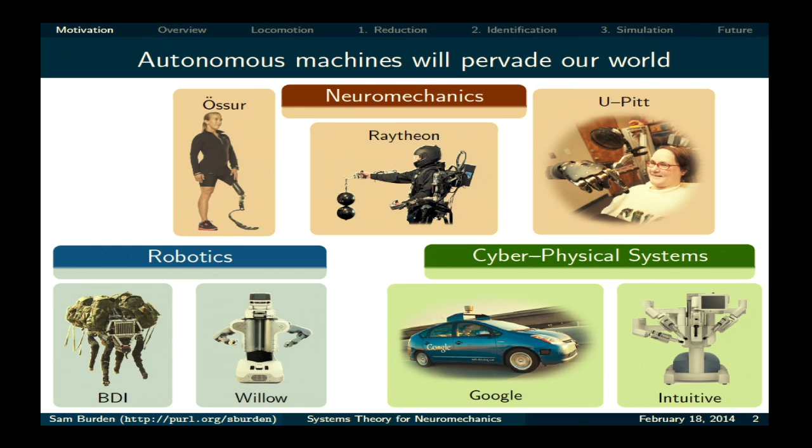And the examples I put up here fall under three broad research areas that I work in: robotics, cyber-physical systems, and neuromechanics. So robotics concerns itself with programming matter to do useful work. Cyber-physical systems deals with the interaction between networked control systems and the physical world. And neuromechanics focuses on the interaction between a nervous system and an environment through musculoskeletal structures, or the body. There's already been tremendous progress in each of these areas, even in just the last 10 years. And the outlook for future research is very bright.

In robotics, we've seen the development of dynamic legged robots that run at body lengths per second at scales ranging from just a few centimeters in length up to multiple meters, like this latest Wildcat robot built by Boston Dynamics. And in robotic manipulation, robots have already proven themselves in factories in high-precision, repetitive assembly tasks. And they're beginning to transfer those skills to the home to perform domestic tasks like folding towels and washing dishes. And the future vision for this, laid out by the NSF's recent National Robotics Initiative, is collaborative robots working together with humans both in factories and in the home.

In neuromechanics, there has been tremendous progress both in the basic science as well as applied biomechanics and applications to human motor control. So in the fundamental biomechanics end, for instance, this experiment with cockroaches running over rough surfaces was conducted by Simon Sponberg, who's in the audience over here. And they found some fundamental insights into the mechanisms that animals use to maintain stable gaits in complicated environments. For instance, it was shown that cockroaches don't even modify the activation pattern they're sending to their muscles to run over this very complicated and fractured terrain. They're relying instead on passive or mechanical self-stabilization mechanisms.

And then in the more applied and human biomechanics end, we've developed prosthetic devices that enable amputees to perform at the highest level of human ability, competing in the Olympics. And we've also been developing brain-computer interfaces that enable people who've never been able to move their limbs to use a robotic arm to perform useful tasks. And some of these techniques are even making their way into textbooks; this is becoming fairly standard material now. And the vision for this, for instance, as a subset of the NIH's BRAIN initiative, is to develop personalized tools for healthcare for individuals.

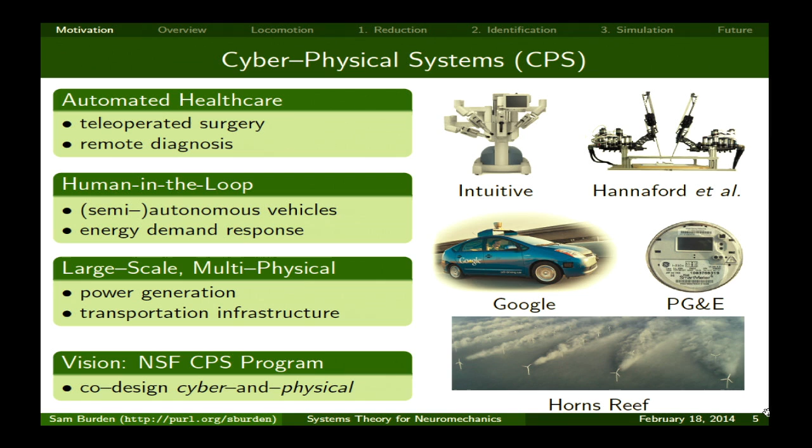And then we've seen the rollout of both large-scale human-in-the-loop systems and large multi-physical infrastructure, for instance, power generation and transportation. And so the vision for this, and the NSF's been working on this for a while with their CPS program, is the co-design of the cyber computational elements together with the underlying physical infrastructure, for instance, the grid or the transportation network. So as I've said, the future outlook for research in each of these areas is very bright, but there are some fundamental engineering challenges standing in our way of getting to that point. And I'm just going to highlight a few of them here.

In robotics, the devices we build still require or rely on very careful calibration, and their performance tends to degrade in not a very graceful way, especially in dynamic or adversarial environments. In CPS, the sheer scale of both the temporal and spatial scales that the systems operate on, and the fact that they're often multi-agent and multi-physical, makes them difficult even to model, let alone analyze, synthesize, and verify.

And then in neuromechanics, we've had great insights into particular tasks or in constrained laboratory-type environments, but it's proven difficult to generalize the insights across and between tasks, or more generally, across organisms that operate at vastly different scales or are comprised of very different materials or have different morphology or kind of the shape of their body.

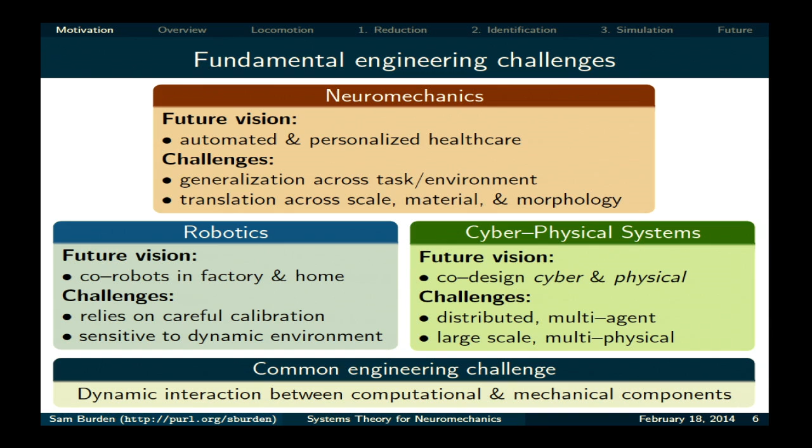And so even though these three areas seem initially quite disparate and separate, I see in the challenges that I've chosen to highlight here a common thread, which is that in each area, what's standing in our way is the problem of engineering and analyzing the dynamic interaction between the computational and mechanical components in the system.

So to go into a little bit more detail about what I mean by that, for instance, in robotics, the typical task is to design the controller and the sensing and actuation systems to interface through the body, the actual physical mechanism, with the objects and obstacles in the environment.

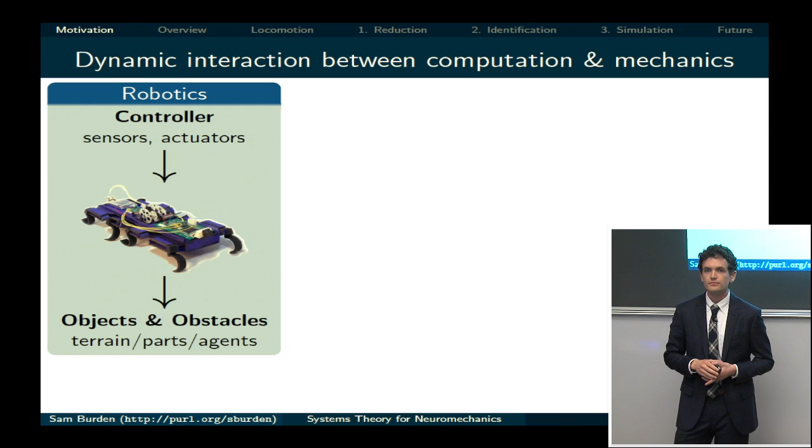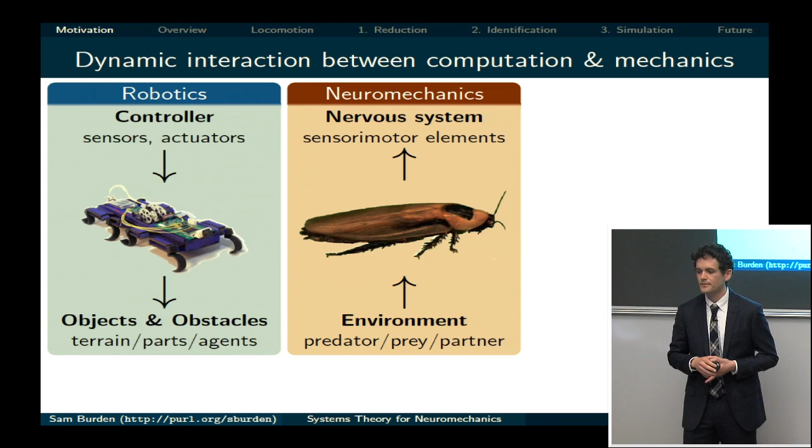In neuromechanics, we're often concerned with actually reverse engineering or going in the opposite direction. So starting from the ecological context or environment that the organism evolved in, using that to determine the constraints and the influences on body design, and then going from that to try to infer something about what the sensorimotor elements in the nervous system are doing to affect the motion that we see, or the behavior we see.

And finally, in cyber-physical systems, we're really concerned with the simultaneous design or kind of going in both directions. So we need to design both these cyber or networked elements and their dynamic interaction with the underlying physical world or infrastructure that we're designing.

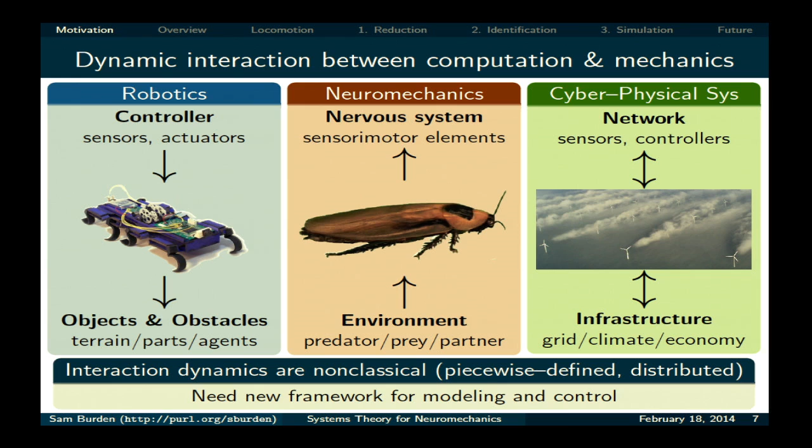And in each of these cases, I want to point out that the dynamics we're looking at are fundamentally non-classical. By that I mean, for instance, they're piecewise defined or so-called hybrid dynamical models, or they're distributed over, again, large scales that don't always fit into the classical modeling paradigms. And so my assertion is that we need new tools and a new framework for both modeling and control in these systems. And so my work is targeted at developing and contributing to the analytical, computational, and experimental tools that let us investigate the dynamic interaction that I've highlighted in each of these areas.

And so the common set of tools that I bring to bear on these problems are the techniques from control and dynamical systems theory, or kind of extending and developing new techniques from this area. And more than just solving isolated problems in these separate areas, I see these techniques as providing connections and potentially bridges, enabling us to translate results between domains. And I'll come back to this idea more at the end of my talk.

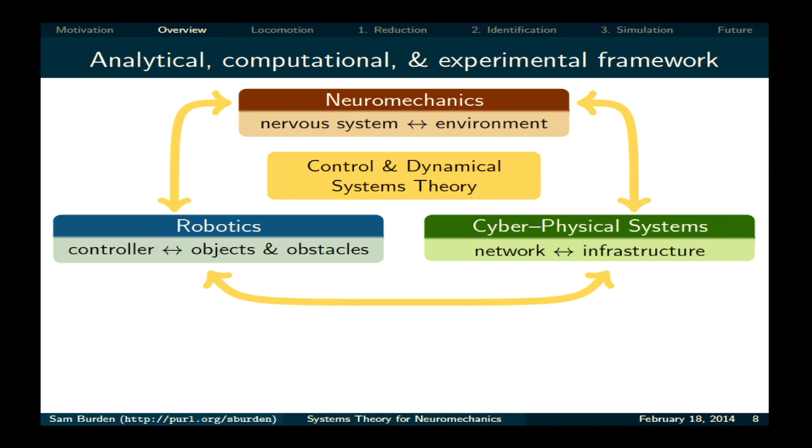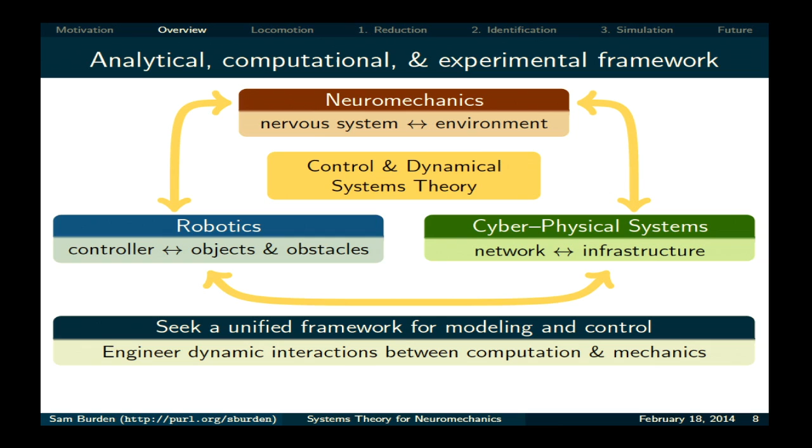And so specifically, I'm trying to develop this unified framework that lets us engineer these dynamic interactions that arise in all three settings between the computational and mechanical elements in the system. And so what I'll focus on specifically today is a set of three key contributions I've made in these areas that pushed us toward a framework for systematically studying terrestrial or legged locomotion. So I'll focus on these two model systems, the cockroach and these small-scale legged robots. And I'll talk about three results.

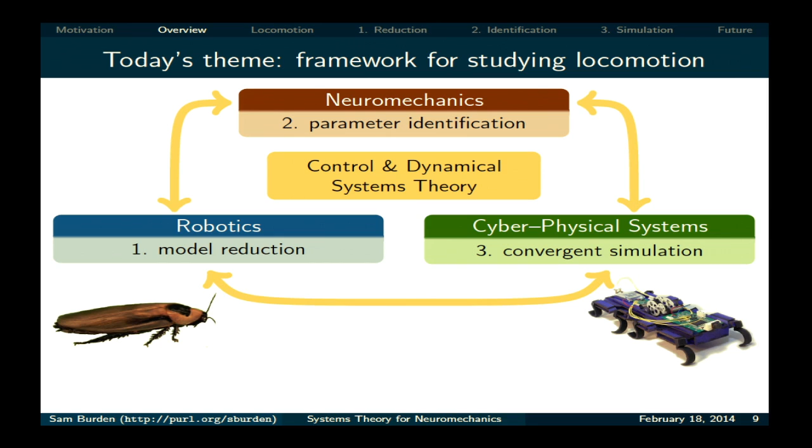The first is a technique for extracting low-order models from more detailed models of these systems. The second is a scalable algorithm for estimating unknown parameters in these models. And then the third is basically enabling us to implement models on a computer and verify that we're actually accurately representing these abstract or analytical models in the digital computer so that we can, for instance, simulate and perform numerical calculations. And altogether, and I'll describe this once I've talked about these three results, I see emerging from this a systems-level theory for neuromechanical systems, or this interaction between nervous systems or computational elements and the physical world.

So to lay this out in a linear order, I'm going to begin with the motivation for how I got interested in this locomotion problem by describing some surprising phenomena that arise when we look at animal gaits and the motion of animals. And then I'll go through these three key results on model reduction, system identification, and numerical simulation. And finally, I'll conclude with some ideas for future directions in research in these areas.

So to begin with, one observation you can make is that though we've made tremendous progress building robots that perform at high capacity, like I showed in the introduction, the performance of robots in most contexts still pales in comparison to that of animals in similar situations. So I'm going to show a sequence of videos that are all from Dan Goldman's lab at Georgia Tech, recent work from there, that kind of highlight this.

So if we take a robot whose gait and whose design was optimized for hard level terrain, and we throw it in a new environment, on a flowing, fluidized, granular media, in this case it's poppy seeds, but you could imagine like a sandy beach or a muddy field or something, then the performance of that robot will often be very poor. So in this case, the robot really just spins its legs and it kind of stays stuck. It makes slow progress, but not very impressive.

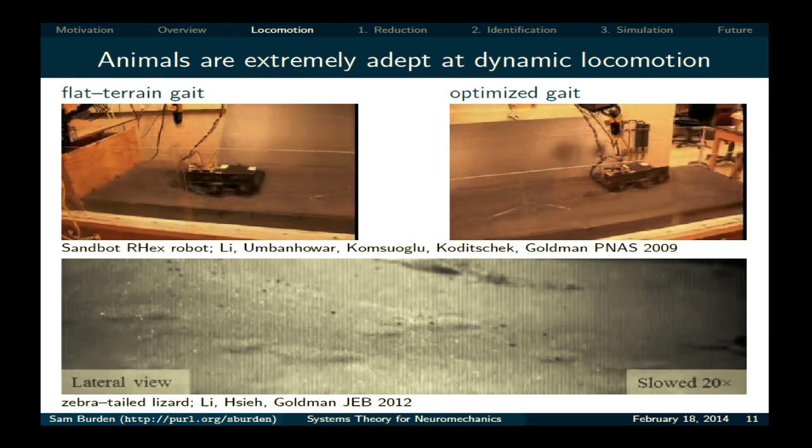And so it's clear that the animals have design principles embodied in them and control principles that we don't yet understand, that we're not able to engineer into our devices. And so I'm interested in trying to extract those principles from the animal behaviors so that we can engineer better systems. And so if you focus on what animals are doing, there's actually a lot of surprising phenomena their gaits exhibit that might suggest some of the mechanisms that are enabling their performance.

So for instance, if I just take data from a running cockroach, which I have here, and I look at the fore-aft foot position of all 6 legs in the center of mass reference frame, and I plot that versus time, as you're seeing in the middle plot here, then you see a highly regular structure emerge. And indeed, if I rescale the time axis by % progress through stride, I get the plot on the far right, this is a gait phase statistic, and I see an almost periodic structure emerge.

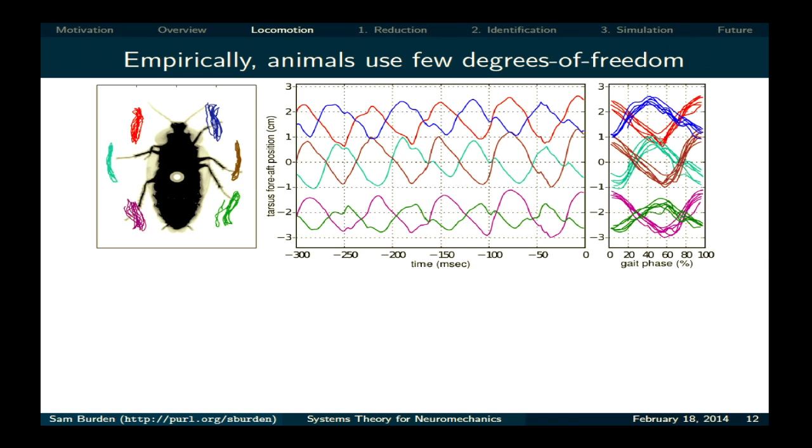It's very striking. And so indeed, if I were to estimate that single statistic as a function of time, this gait phase, I could reproduce or predict to high accuracy the entire mechanical configuration of the whole animal. And if I further refined this model and added extra dimensions and accounted for more of the variation in my data set, then I could arrive at a more accurate model and at some point reach diminishing returns in terms of my ability to predict what's happening. I essentially capture all of the behavior of the system.

And so this was actually carefully conducted by a colleague and collaborator of mine, Shai Revzen, recently. And what they showed is that these cockroach dynamics, when they're running just on hard ground with no obstructions, are approximately 7-dimensional. This is really surprising, given that the animals have more than 7 mechanical degrees of freedom in every limb. So there's a huge degree of dimensionality loss and intrinsic reduction happening in these animal gaits, and we don't really understand why that's happening.

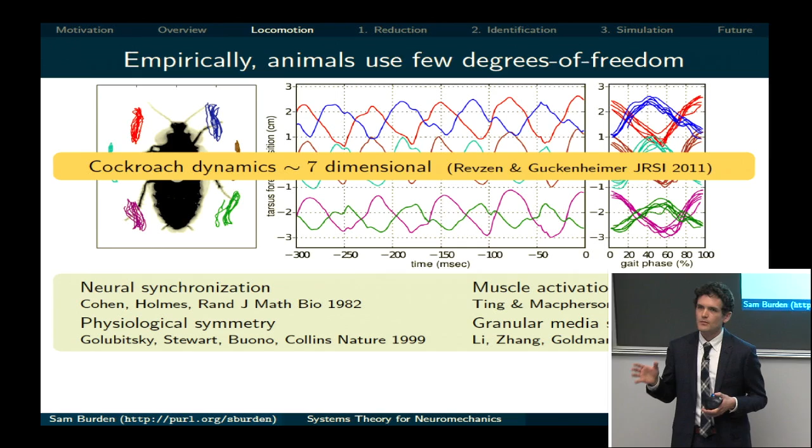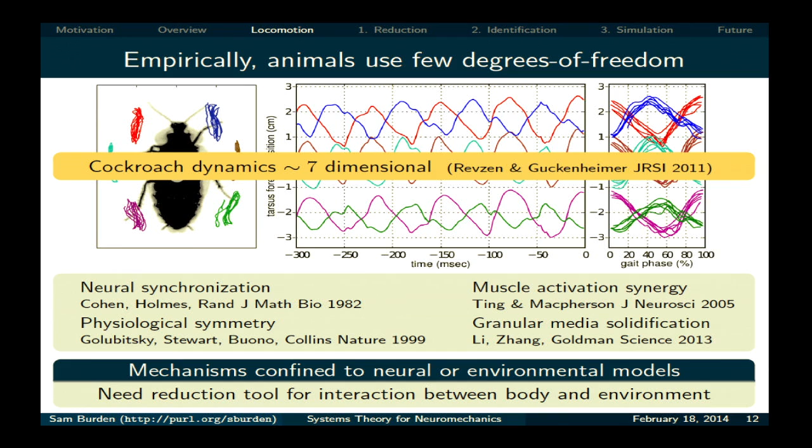The mechanisms are partially understood, mostly at the level of neural synchronization or muscle activation symmetries and synergies, or at the external environmental level, these solidification effects I mentioned that can make even granular media appear as firm and solid as hard level ground. But there still could be something in this dynamic interaction between the nervous system and the external environment. And so this is exactly the area that I'm focusing on and that I'll present in this talk.

And so what the evidence together suggests, though, the fact that the animals have this low-dimensional behavior, is that it should be possible to describe their behavior using a mathematical model of significantly reduced order, literally on the order of 10 states. And if this were possible, if I could use this model, this framework was proposed by Full and Koditschek about 15 years ago.

In particular, what they said is that this low-dimensional model shouldn't only reproduce the sort of average or steady-state behavior of the physical system, but moreover, it should accurately predict the system's response to perturbations and parameter variations. If this were true, if I could find a reduced order model with on the order of 10 states that accurately predicted the behavior of a physical system as complicated as a cockroach or a small-scale robot, this would be an extremely powerful technique for studying the systems, because I could effectively reduce questions regarding design or control to the equivalent questions in the simplified mathematical model.

And because the model is so simple, I could completely analyze it, either by pen and paper or just exhaustive numerical experiments. I could solve my design or my control problem and lift the solution back up this hierarchy into the original physical system. But clearly, there are some significant gaps that remain to actually operationalize this idea and apply it to any particular physical system.

So in particular, any mathematical model we make, no matter how detailed, is always an approximation of the underlying physical world. And so necessarily, we have to go through some process by which we associate the model with data collected from the physical system and validate its behavior. And secondly, once I have a high-dimensional, detailed mathematical model that I think is reproducing the behavior I'm seeing, I need some systematic techniques to actually extract from it and distill it down to one of these simplified reduced-order models.

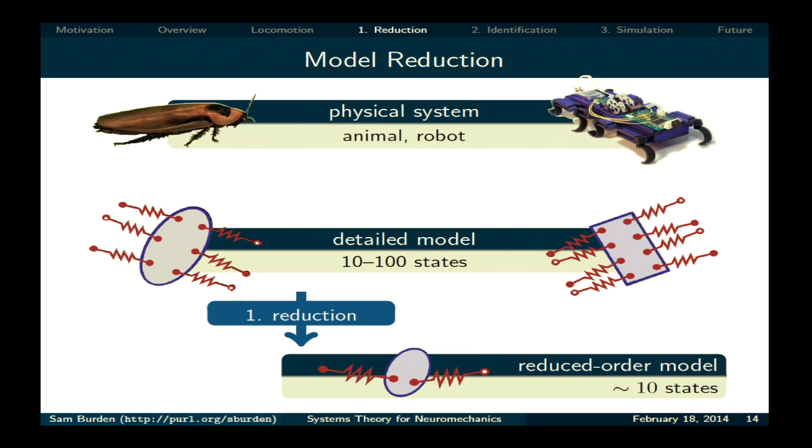And then in the context of simulation, there had been an algorithm proposed, and I'll get into some of the details about why that doesn't apply to this class of models in general as well. So to begin, I'm going to focus on this model reduction problem, and specifically finding a technique that enables model reduction to happen near periodic orbits in a broad class of models for locomotion.

So the initial example that I want you to have in mind, and that I'll refer to throughout my talk, is this vertical hopper example to illustrate the concepts and the results and the techniques that I'm presenting. I want you to keep in mind that this is not the only model I can apply these techniques to. It's just the one that makes it easy to explain, and I think there's rich intuition there. So this model consists of two masses that move vertically in a gravitational field, and between them they have a spring and an actuator.

And so if I drive the actuator with kind of a periodic input, then the system settles into a sort of periodic steady state hopping motion like you see. And I should point out that the model here is that when the foot strikes the ground, it instantaneously dissipates all of its kinetic energy. So it's a perfectly plastic mechanical impact.

You can think about, when my foot actually strikes the ground, it doesn't sort of ricochet off in an elastic way. It actually sticks and deforms and kind of adheres to the substrate. And so there's already something interesting happening in this model that you might not have thought of the first time you saw it, which is an interesting kind of dimensionality loss that appears to be happening.

So if I imagine the state space for this system in the air mode and in the ground mode, then I get a picture that looks kind of like this. In the air mode, when the foot is off the ground, there are two mechanical degrees of freedom. And so the system is four-dimensional, that I've illustrated with the three-dimensional looking tube up there, so you'll have to bear with me on visualizing four-dimensional spaces here.

But then when it's in the ground mode, when the foot is on the ground, it's at zero height and zero velocity. So I can effectively remove it from my state momentarily, and I can just think about the one mechanical degree of freedom that remains in the body mass. In which case, that bottom patch, that two-dimensional sheet there, is actually an accurate picture of the two-dimensional state space in that mode.

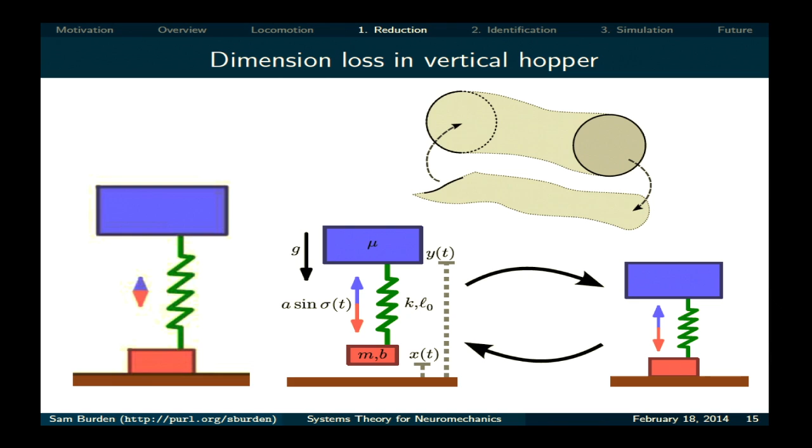And when the system's doing this periodic hopping type motion, it's cycling back and forth between these two regimes. So if I think about a periodic motion here, and I think about initializing a volume of initial conditions in that unconstrained air domain, there's two mechanical degrees of freedom, so there are four dimensions that volume takes up. And then as I flow it around one cycle, when all of those initial conditions reach the ground domain, then this new constraint appears and they flatten down to a two-dimensional sheet kind of volume.

But then because the model is deterministic, when I keep on propagating and those initial conditions return back to their air domain, they can't regain the dimensions that were lost. So they're still constrained to being on a two-dimensional subset of the full four-dimensional space. So already, in this thought experiment, there's already some kind of hint of dimensionality loss appearing, even in this very simplified mechanical model.

So it's exactly this route to dimension or model reduction that I'm going to significantly generalize and formalize in the remainder of this section. So to do that, I need to build up just a little bit of mathematical notation. So the class of models that we're interested in are these hybrid dynamical systems. You can think of this as just comprised of disjoint, regular, ordinary differential equations on subsets of Euclidean space. That's kind of what I have illustrated here.

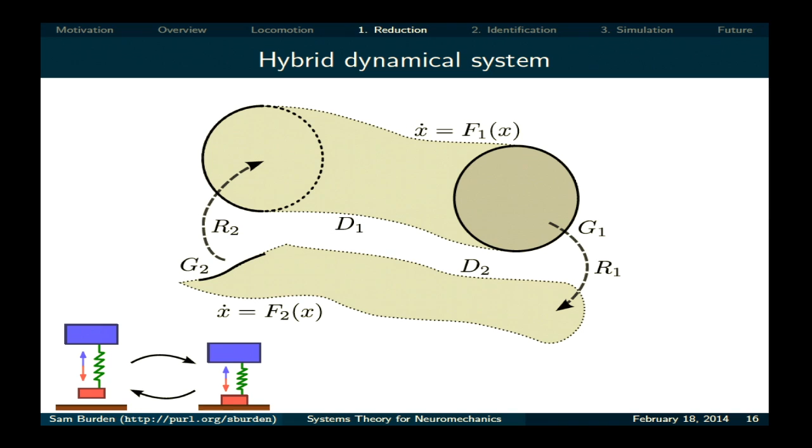So I have D1 and D2. You could think of those as just two different versions of some Euclidean space. And on each of them, I have a differential equation, x dot equals f of x, f1 or f2. But then I also have these rules or these regions where I switch between the two domains. When my foot strikes the ground, then I actually jump to a different regime or a different space.

And so if I think about the dynamics for these systems, starting from some initial condition x0, I basically solve the continuous time ODE until I collide with one of these guarded regions indicated by the g's here, at which point my trajectory is instantaneously reset to the new domain, and I continue flowing as before. Just a little bit of notation I'm going to need later on in my talk is I will let phi denote the flow for the system. So phi of t comma x0 is the point on the trajectory that starts at x0 after it's gone forward for t time units.

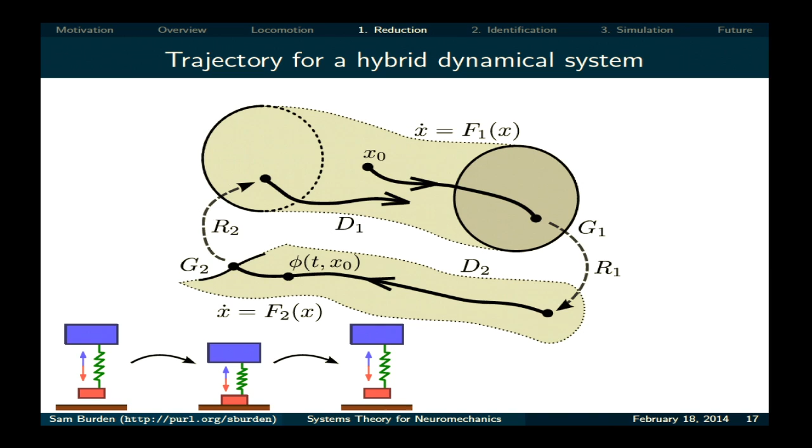And we'll be particularly interested in periodic trajectories in this class of systems because those model in a canonical way the periodic gaits of animals, at least in their center of mass reference frame. And so a periodic trajectory here is just going to be one of these trajectories that eventually folds back on itself and just continues cycling around, repeating the same path over and over again.

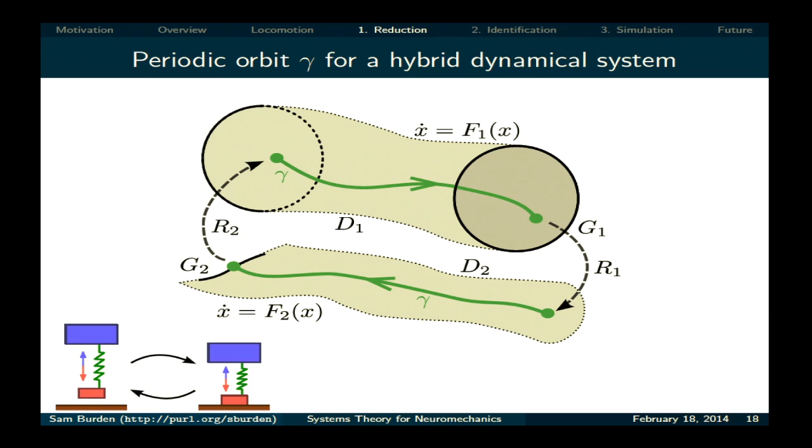So whenever that happens, I'm going to denote that by gamma, and that'll be how I refer to periodic orbits. So to study the dynamics near these periodic orbits, I'm going to use a tool that was actually originally developed for classical ordinary differential equation dynamical systems called a Poincare map. So if you haven't seen this construction before, I'm going to quickly go through it.

So formally, I start from some initial condition x0 in the section, and then I solve this trajectory forward in time until it collides with this surface again. And I use that to define my Poincare map P at the initial condition x0. So if you've never seen this construction before, your mathematical sense might be kind of tingling a little bit. You might be wondering whether this even gives a well-defined mathematical object or whether it has any reasonable properties at all, continuity, differentiability, et cetera.

But it turns out that for the models that we're interested in, under some fairly mild assumptions, and this has been known since the 50s by the Soviets, this map defined in this way is actually smooth. It's differentiable in a neighborhood of the fixed point c. Note that if I were to evaluate the Poincare map at c, I would just get that point back because that's on the orbit. So this map is actually well-defined even in this hybrid setting. So now we can use this to try to study the dynamics near this orbit.

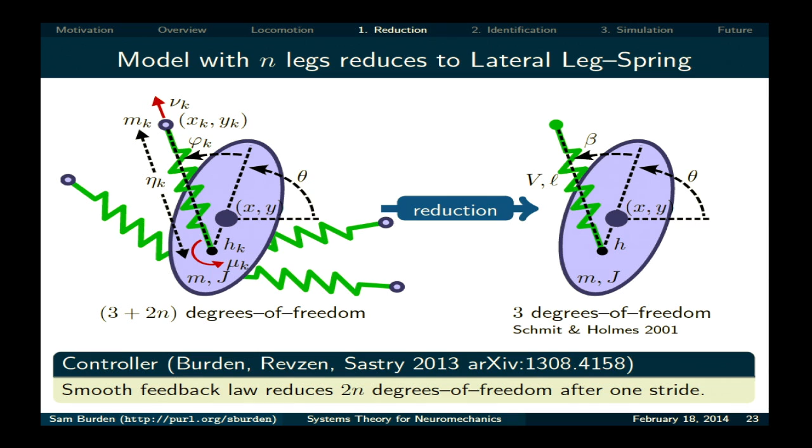And in fact, if I replaced it with a different state feedback law, or if I perturbed the state feedback law I had, then this sort of exact reduction phenomenon wouldn't occur, generically in this case. What does happen generically, and the details are in this arXiv preprint, a recent submission that we have, is that another type of reduction happens. There's an approximate reduction that occurs, even in that case. So for anybody that's interested in that, I'd be really happy to talk about that more after the talk. But that's a great question.

So to conclude this section, I want to point out that basically we have this technique for model reduction that shows that models for periodic gaits in this class of hybrid systems generically reduce their dimensionality. This is this topic I was talking about right at the end.

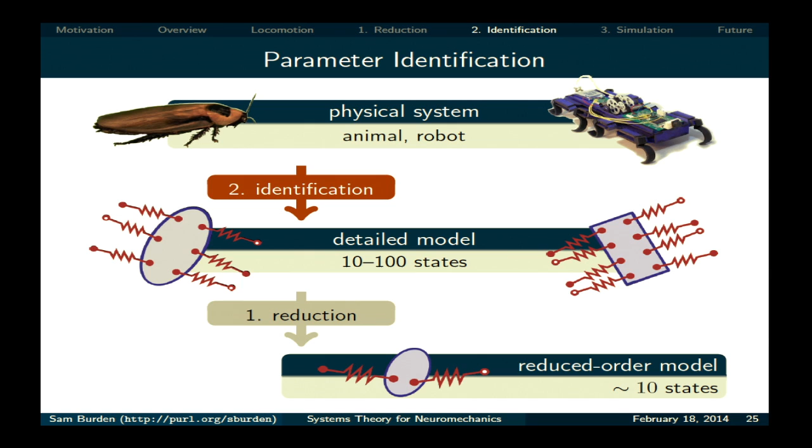So now I want to move on to show how this reduced order structure can be used to implement scalable parameter identification algorithms for this class of systems. So just to remind you, the kind of problem that we want to try to solve is we have these interesting physical systems, cockroaches and robots, that are executing rhythmic behaviors in the environment, running across the ground or on a treadmill. And what we want to do is take a mathematical model and tune the free parameters for the model to best reproduce the behavior of the physical system that we can.

And so specifically, the formalism that we use to do this is prediction error minimization or expectation maximization. And so just to get an initial start on this problem, we try the kind of blunt approach of just saying, okay, let's assume that I have a model for a physical system. Again, I'm just using vertical hopping as an illustration here. That I can simulate my model and observe it, so that's this y function giving me observations, for instance, position or height of center of mass as a function of time.

And I'm going to assume in this identification setup that the data I'm getting from my physical system are noisy observations of simulations from my actual model from some unknown initial condition z star. So then what I'm going to do is choose some error function that basically just measures the discrepancy between the observations I get from my simulation or my model and from my physical system, and I'm going to search over the state space and the parameter space in order to minimize this prediction error. This is a very blunt approach, but it turns out to be hard to solve even this version of the problem, let alone more refined further techniques we'd like to develop.

And the assumption I'm going to impose, just to make the problem remotely tractable, is that these observations should be smooth functions of time, so they should be smooth along the trajectories. So for instance, this is pretty reasonable in the context of locomotion because I'll typically attach motion capture markers to the trunk of an animal or a robot. And so those data at a high level of accuracy will evolve fairly smoothly in time.

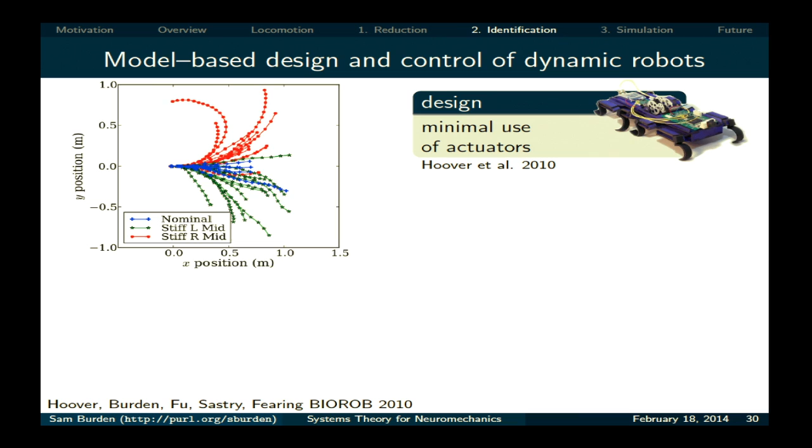And then in the context of robotics, the project that I've been most intimately involved in involves developing small-scale legged robots. So small scale means palm size, like 10 centimeters long. At this scale, the big constraint that you have is that you can't pack it full of actuators and power sources the way you can at larger scales. For instance, Big Dog uses a lawnmower engine. We can't do that on these small-scale robots. We're limited to a very small cell phone battery. And so it's important to get the most you can out of all of the actuators you have.

And so my collaborator, Aaron Hoover, who's now at Olin College, came up with a very clever mechanical design where he used a single DC motor to drive all 6 legs in synchrony in an alternating tripod, cockroach-like gait. But the problem is that that robot could only run straight. So we needed some way to introduce the ability to turn left or right.

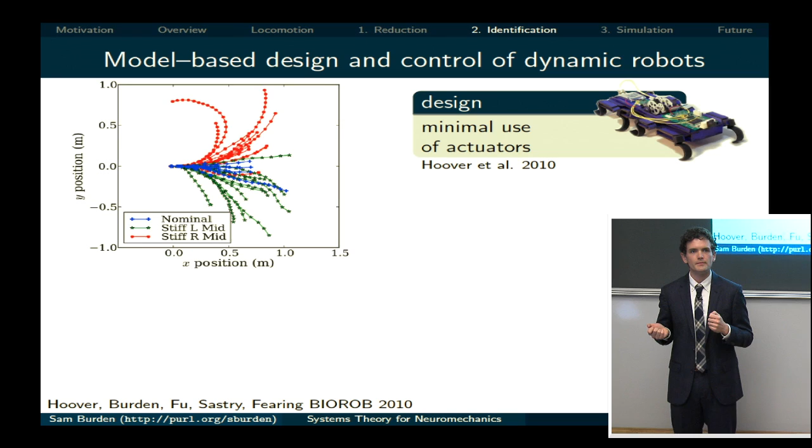And so drawing on some inspiration from models that were developed to model animal turning, we realized that if we just introduce asymmetric leg stiffness changes, if we just stiffen the leg on one side or the other of the robot, it should turn. So we did some initial experiments that appeared in a conference paper where we physically swapped out the stiffer leg on one side or the other, and we got fairly consistent turning results.

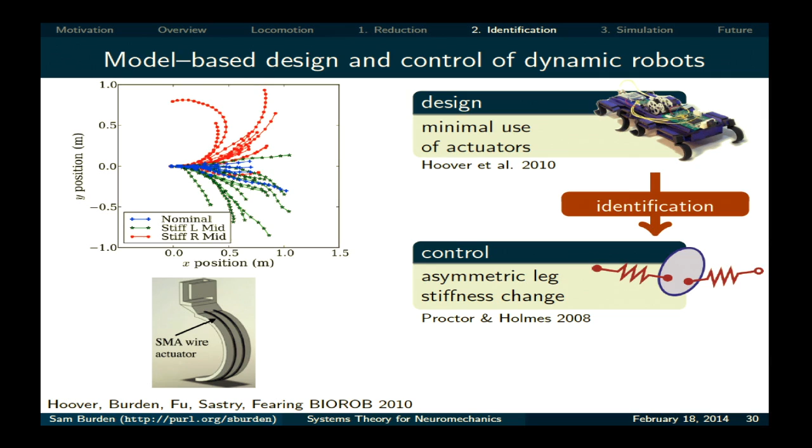So now what we want to do is integrate actuated stiffening, or active stiffening, using these muscle wires in the legs, and then use one of these reduced order models fit to the physical robot to optimize the control input we put into the actuator to optimize the turning. So the takeaway from this parameter identification section is that the model reduction scheme that we developed enables us to implement a scalable algorithm for estimating unknown parameters in these models of locomotion.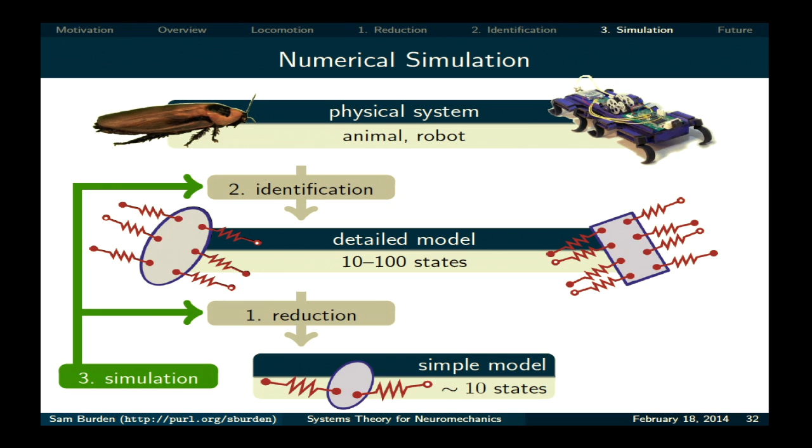So now I'd like to move on and describe this third key contribution in the area of numerical simulation of hybrid systems. I've already illustrated the systems we're interested in, but I'm going to give you a more broad context. These hybrid control systems arise all over the place, not just in locomotion, whenever you have distinct operating modes. These can either be physical dynamical regimes like we encounter with locomotion and manipulation. The dynamics of me reaching for a cup are different once I've actually grasped it. But this could also arise from, for instance, a digital controller state, an on-off in your thermostat, or a more complicated automata in some kind of embedded system.

And so the important point here is that the state space for these systems is really comprised of these distinct and incompatible operating modes. So there's like a continuous domain for every different mode I can be in, and they are not directly related to one another. And this kind of gives us a couple of obstacles in looking at distance and simulation that we don't have in classical differential equation systems in Rn.

So in Rn, or in Euclidean space, we naturally inherit a distance metric, almost magically, that's induced by the norm that comes from the vector space structure. So if I have 2 points x and y, I just take the norm of x minus y, and that gives me a distance for those 2 points, whatever norm you want to choose.

Similarly, there's a problem that's very simple to solve in classical ODE systems of simulation, which is that I do the simplest possible algorithm that you could think of, forward Euler, where starting from my current state, xk, to determine the next state, xk plus 1, I just evaluate my vector field f at my current state, and then I just move some fraction h, this is the time step, in that direction. So this very straightforward scheme turns out to have very nice formal properties. It converges uniformly with a linear rate of convergence, which is really, really nice for deriving further results.

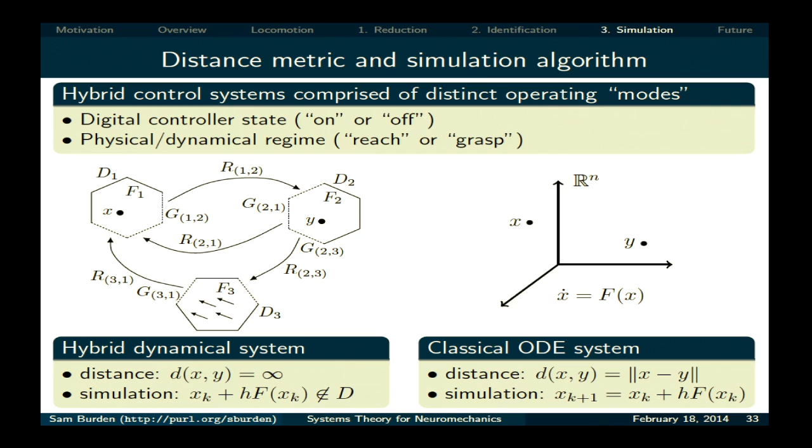So the construction for the distance metric, it's motivated again by this property that states in different modes don't seem to be directly comparable. But they are related in some sense because we have these resetting or switching maps that are taking us between domains. And so what I can do is actually use this reset map to take these two spaces, D1 and D2, these two distinct modes, and I can perform surgery. I can put mathematical glue and take a topological quotient and stick them together to become a new space over which I can define a distance metric that gives me finite distances between all pairs of points. So this is our distance metric construction.

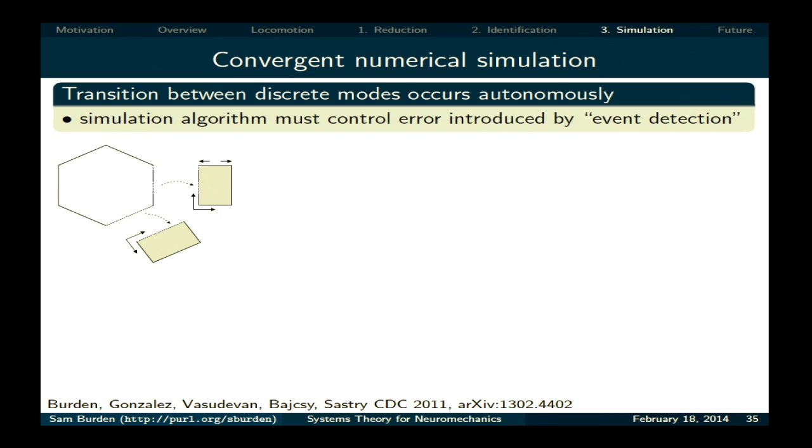And what this enables us to do is actually prove that that naive or simple forward Euler scheme that I described does actually converge for this class of hybrid systems. So the basic problem with simulation when we have these boundaries or these events that are occurring is that the simulation algorithm will inevitably introduce some error in approximating exactly when the trajectory crosses the event surface, exactly when does my foot strike the ground. And so any algorithm must control the error introduced by this event detection subroutine.

And so what we did is we said, OK, allow yourself to make some error. So basically attach extra space, again using a topological quotient, to this original thing that was just like a shield blocking you from exiting the domain. Now just add a little region that your simulation can land on, and then control the error by increasing or decreasing the size of that region that you actually stick to.

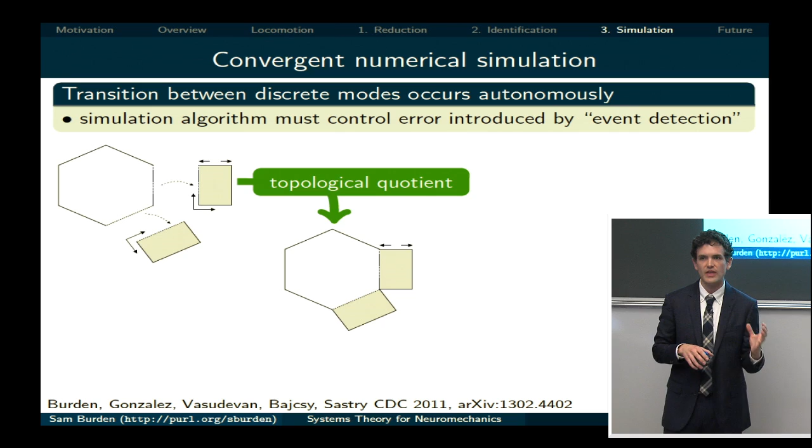And so what we show is that actually if you just implement straightforward forward Euler, this will converge, again, uniformly with a linear rate of convergence, which is the result that we had in the classical setting, for any orbitally stable execution, which is a technical term I'd be happy to talk about in more detail offline, but basically, any reasonable trajectory for your system will be approximated by this algorithm.

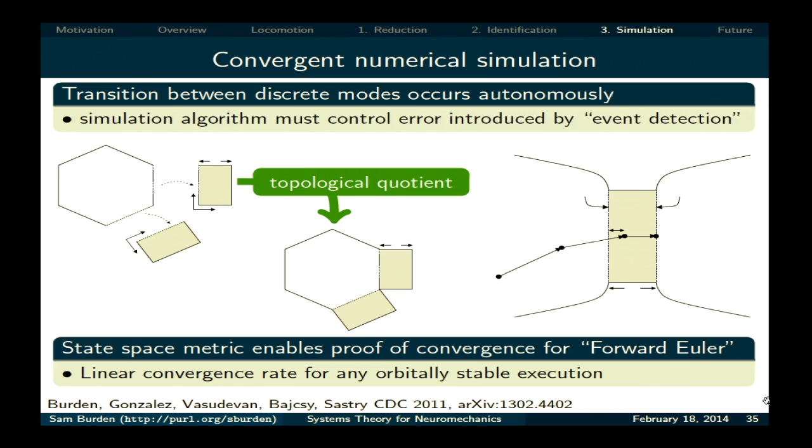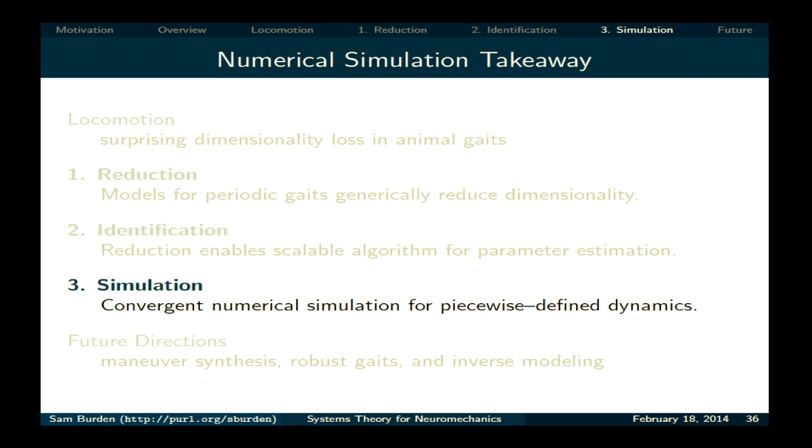So the conclusion from this section is that we have this convergent numerical simulation algorithm for this broad class of hybrid control systems that we can use as a foundation to build on more elaborate tools like for optimization and synthesis. And so pulling these three contributions together and filling in this diagram that I introduced at the beginning of my talk, I think what we're really on the verge of is developing a systems level understanding or a systems theory for these neuromechanical systems governing locomotion and even manipulation.

And I think there's still a lot of work to be done that I'm very interested in doing, kind of ongoing and future work. I'm interested in filling in the other gaps in this diagram, in particular in reversing the direction of some of these arrows. So taking simple models and robustly embedding them, which actually partially addresses Eric's question about the sensitivity or the robustness of the model reduction process, in higher dimensional, more detailed and faithful representations. And then actually using those detailed models to synthesize control inputs and feedback laws for real physical systems like robots to get them to perform new tasks.

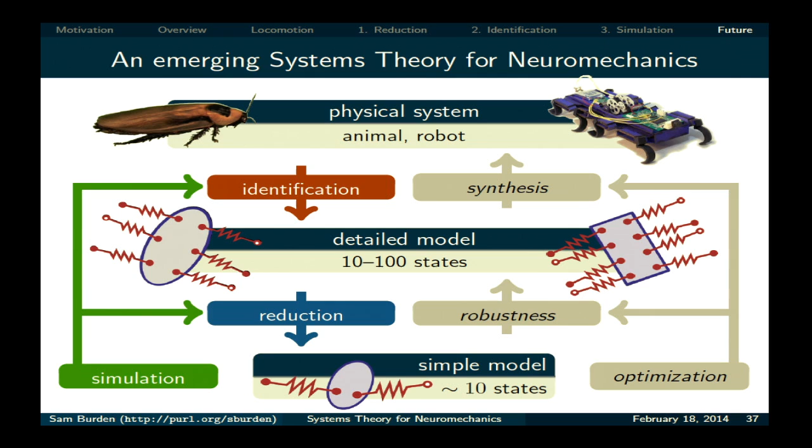And so putting this back in the context of this original picture I drew, I really think that these three results are providing strong connections between what initially seemed like different or unrelated disparate domains. So for instance, originally I was motivated to look at this model reduction phenomena by observations that were being made in biomechanics and neuromechanics. But now that we have this new formal tool that enables us to synthesize feedback laws that do reduction in robotic systems, now we have a new idea about a mechanism neuromechanical systems may be using to simplify their dynamics. So it goes both ways, basically.

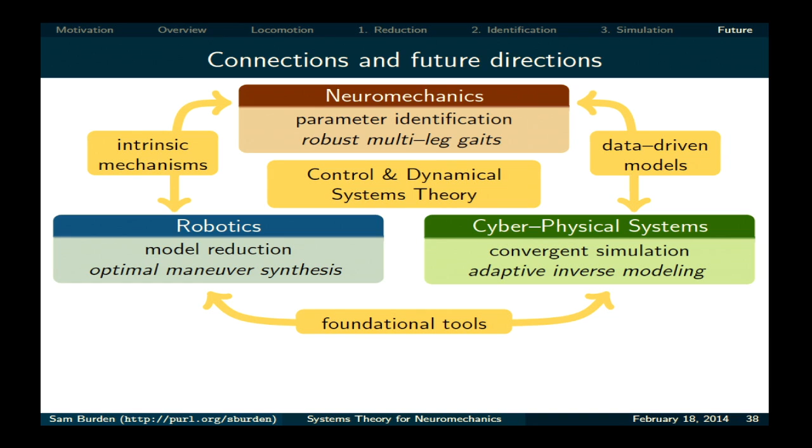And I think the connections are strong as well between these other areas in terms of translating fundamental tools for metrization and simulation back and forth between these domains, and developing techniques for data-driven modeling that apply both to specifically the neuromechanical systems I'm interested in, but also the broader class of cyber-physical systems that contain them. And so I just want to give you a brief overview of where I see this going, a few more projects I'm doing that I think continue to fill in this overall picture and strengthen the connections between these areas.

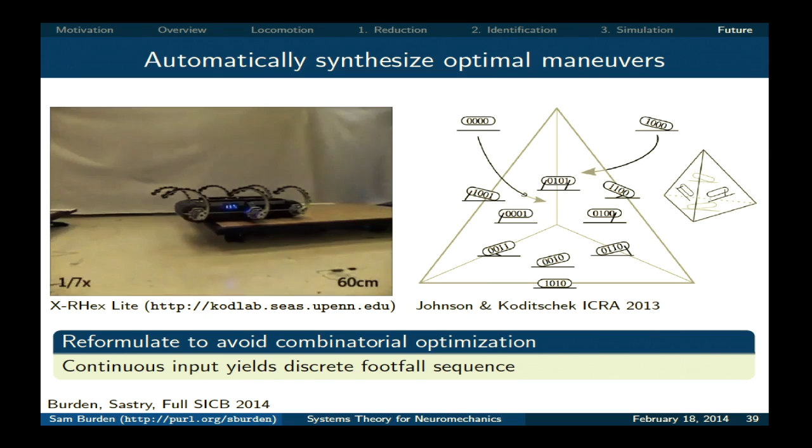So in robotics, I've been motivated by some spectacular results from some of my collaborators, Aaron Johnson and Dan Koditschek at Penn, in a recent ICRA paper, where they took their six-legged breadbox-sized robot called RHex, XRHex in this case, and by carefully hand-tuning the inputs to all of the legs, they were able to get it to execute these spectacular dynamic maneuvers. But the important observation here is that if I took this robot and put it outside on unlevel ground or with a ledge height slightly different than what you see in this video, then this behavior would probably fail.

And so then for that particular environment, we'd have to take Aaron back out into the field to take careful measurements and do careful hand tuning and use his deep mechanical insight in order to synthesize a new behavior appropriate for that context. But it's clear that if we want our robots to be behaving in the real physical world, we need them to be able to synthesize those behaviors automatically, possibly extremizing some performance criterion or doing this optimally in some sense.

But this is a very challenging problem because the first thing you might think to do is, okay, I will just think about where and when I'm going to place every one of my feet and in what sequence, and plan in this discrete combinatorial contact sequence space. The problem with that is that explodes really quickly in dimension, and so that's actually intractable to do the path planning over that space.

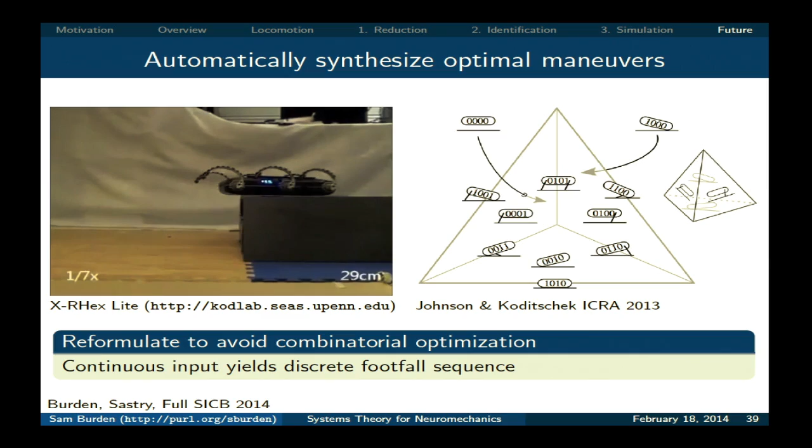And so our insight, and I've presented some preliminary results in this direction at a recent biology meeting, is that if we just take a step back and realize that this is a physical system, if I plug in a continuous input, for instance, to all of the motors, it will result in some discrete sequence, but I can just directly try to do my optimization over that continuous space where I have scalable tools.

And this is surprising for a few reasons. So first of all, there's some theoretical work that suggests that it's less energetically efficient to have two limbs hit the ground at the same time than to space your footfalls out equally in time. So it's surprising for that reason. It also seems like a very challenging control target to hit. I have to get two legs to hit the ground at exactly the same time. And so if there wasn't some pressure on the animal, some benefit it was getting from doing that, it seems unlikely that the nervous system would have evolved to execute that gait.

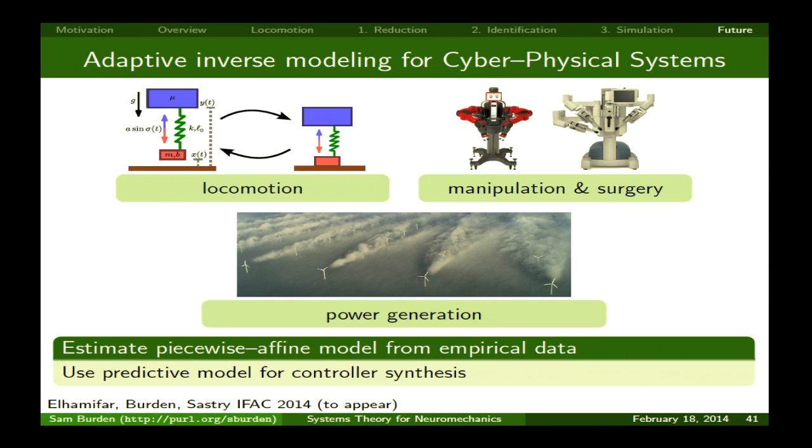And the underlying model that we want to ultimately obtain, we think it would be good to start with something deterministic so that we can synthesize inputs to actually get the system to behave how we want to. But because the kinds of models that we're fitting, these piecewise things, could fit into the classic stochastic control context as well, we could also try to apply those techniques.

I guess it's just a question of, you don't know where the boundaries are between the different domains yet. Right. And your models require that you know where those boundaries are in order to topologically glue them together. And therefore, that's the part that doesn't fit in the linear control systems part. You have to decide where those are, and those ought to be subject to some kind of noise issues. Yeah, I see.

So the refinement of the question is that it's very important to the results that I'm presenting, especially these topological quotients and other kinds of tricks I'm pulling, that we know exactly where the crisp boundaries are between domains in the system. So in fact, this is exactly why we want to use this piecewise defined class of models, but we're simultaneously estimating both the linear control system regimes and the transition between them.

The motivation for this, again, is that any model is always going to be an approximation. It isn't true that there is one mode where my foot is in the air and one mode where it's on the ground. But I may be able to reproduce to high precision the trajectory data I'm getting from, for instance, a locomoting system by fitting an appropriate boundary between distinct regions in the state space.

And I'll refine this as well to say that in this particular case, we're starting with observations that let us simultaneously fit. We're basically partitioning one state space as opposed to fitting totally disconnected and disjoint regions. So when we fit a surface right now, that already cleanly has the kind of attachment between adjacent domains.